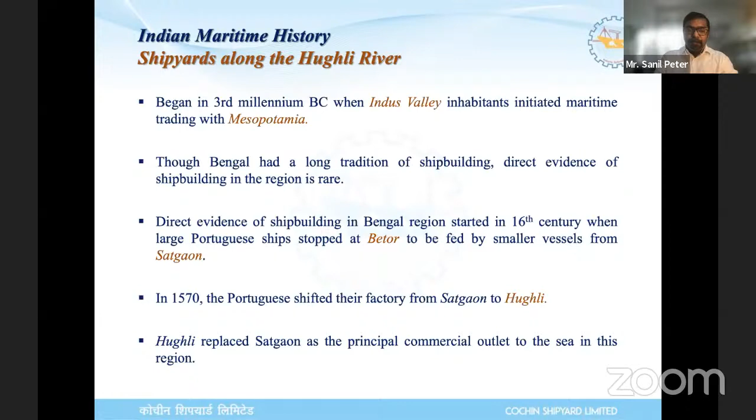We always talk about the western region, Mumbai and all. The direct evidence of shipbuilding in Bengal region started in the 16th century when large Portuguese vessels started coming to Betor, and it was fed by smaller vessels from Satgaon. In 1570, Portuguese shifted their factories from Satgaon to Hooghly, and Hooghly replaced Satgaon as a principal commercial outlet in the marine transport.

Shipping facilities in Calcutta started with the establishment of Calcutta Port Commissioners in 1870, and this coincided with the completion of a railway network in India. And this had a new thrust in India's international trade.

Around the 18th century, mid of 18th century, absence of a docking facility became a major concern, because vessels plying in the eastern region, for any repair, had to be taken back to Mumbai because the repair facility was already available in Mumbai.

So in 1790, a first dock was built at Bangshal Ghat, which is somewhere near the Prinsep Ghat and all. And Colonel Watson commenced the construction of a wet dock in Kidderpore in the 1780s. But this was unfortunately abandoned due to some legal disputes. Later on, Chandan Nagar, Titagarh, Salkia, Howrah, Shibpur, Kidderpore, and Calcutta became the main shipbuilding locations during the British era. This is one of the British era charts of the Hooghly River dating back to 1794.

Coming to Hooghly Docks and Port Engineers, popularly known as HDPEL, is one of the oldest shipyards in India. It was established in 1819 as a private sector shipyard, known as Hooghly Docking and Engineering Company Limited.

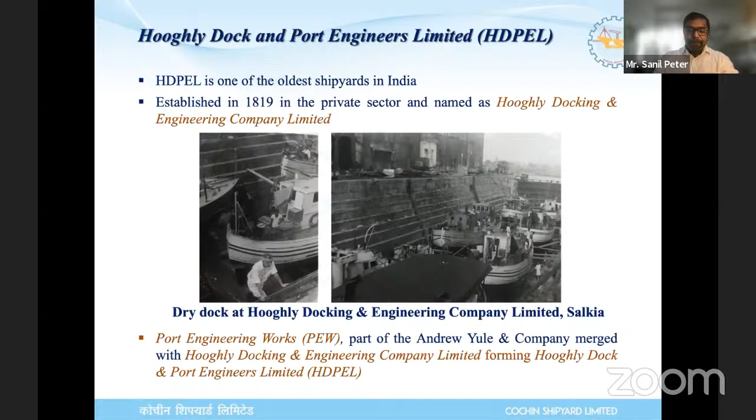It was later merged with the Port Engineering Works, a part of Andrew Yule Company, and became HDPEL. HDPEL has two units, one in Nazirganj and the other in Salkia, on either side of the Hooghly River near Hooghly Bridge. Shipbuilding capacity ranges up to 1,100 tons per annum. They have built various vessels like tugs, dredgers, floating dry docks, trawlers, barges, smaller cargo vessels, etc.

The clients included IWAI, ONGC, Paradip Port Trust, Andaman Administration, and others. The Kalighat is one of the last vessels built by HDPEL. HDPEL was operational till the 1980s, and later ran into financial problems, coming under the administrative control of the ministry.

Calcutta Port Trust is one of the oldest ports in India. In 1820, shipbuilding was mostly concentrated in Sulkia, now known as Salkia, and also in Howrah and Kidapo. In 1892, Kidapo Docks, popularly known as KPD, was completed, and in 1925 Garden Reach Jetty was added to accommodate the increased cargo trade. Later in 1928, King George Dock, now known as Netaji Subhash Dock, was established.

Cochin Shipyard's ship repair Calcutta Ship Repair Unit is operating from Netaji Subhash Dock. It was commissioned in 1928, and in 1973 it was renamed Netaji Subhash Dock, NSD.

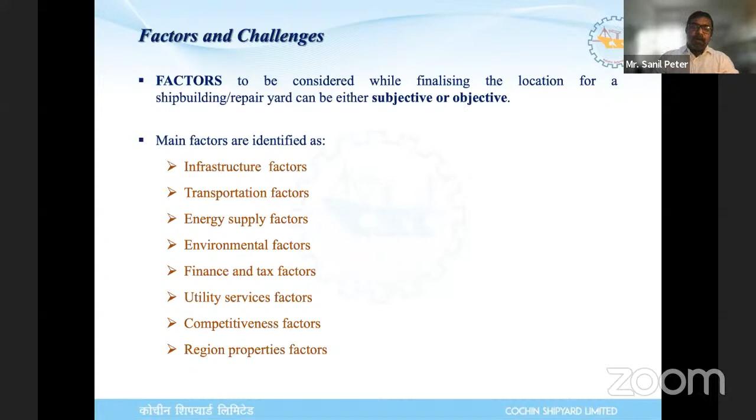All these factors can be further divided into sub-factors like transportation, which we already discussed. Both Calcutta and Howrah are well connected by rail, road, river, and air.

Even then, when we started developing the Nazirgunge facility of Hooghly Docks, those who have visited may recall that particular facility is in a congested area with very congested roads. So before starting development, we conducted a truck trial, a maneuverability trial, to check whether it was possible to bring trailers during night time and whether maneuverability was possible.

Uninterrupted power supply is key to any industrial facility, and shipyard processes like welding and cutting require power supply. West Bengal is considered one of the power surplus states.

Availability of industrial gases, whether it is oxygen, acetylene, or nitrogen - they are easily available, either by trucks or in gas bottles. Availability is not a problem there.

When we consider the climatic conditions, Calcutta region is semi-prone to natural disasters like cyclones and earthquakes. It falls under seismic zone 3. Although the region was badly affected by the recent cyclone Amphan, generally this region is considered not prone to cyclonic activities.

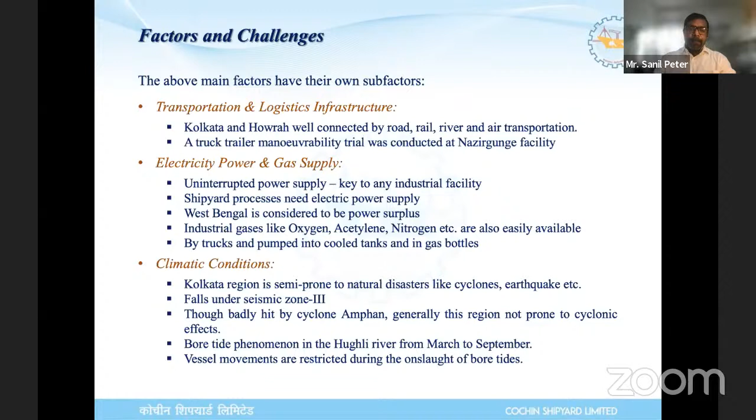At the same time, from March to September, in the Hooghly River there is a phenomenon called bore tide. During this time, vessel maneuverability and movement have to be taken care of, so restricted movements are there. Then another factor is availability of skill set, whether unskilled, semi-skilled, or skilled labor.

This is one of the major cost items in any shipbuilding or ship repair. In Calcutta region, it is supposed to be cheaply available, but from our experience it is not that cheap, because most of the laborers from West Bengal are now either in Kerala or other parts of the country. So it's very difficult to get skilled workers cheaply. Most of the laborers we are getting now are from UP, Bihar, and Orissa.

And proximity of institutes like IIT Kharagpur, IIEST Shibpur, other engineering colleges, and Jadavpur University ensures that we have availability of skilled manpower, and also they give us consultancy services allied with shipbuilding and ship repair.

For a shipbuilding or ship repair facility to be successful, we need support of suppliers, subcontractors, and other industries. We normally go with a turnkey subcontract model, keeping only a minimum staff as key operational staff. It's a turnkey subcontract model that we are following nowadays.

And factors like suppliers and general industries are also favorable in the Calcutta region. There are many steel mills in close vicinity. In Jharkhand there are steel suppliers, so getting steel materials is not an issue.

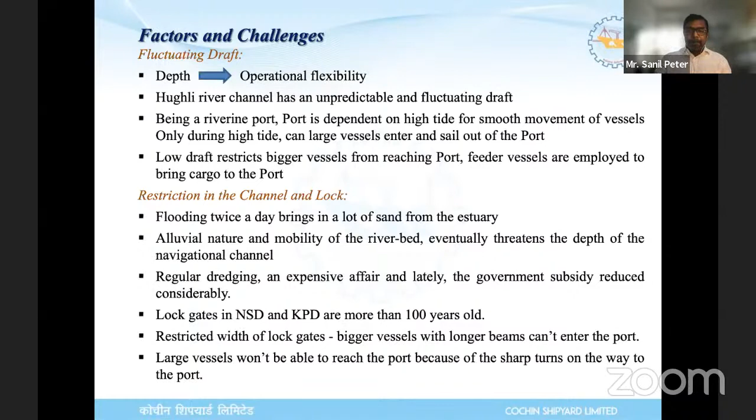The lock gates in both NSD and KPD are more than 100 years old. It still works perfectly, but it's 100 years old. There is also a restriction with respect to the maximum width of the vessels, so bigger vessels with longer beams cannot enter. So there is a restriction regarding vessel size and draft.

Another restriction we identified during the assessment is that the water channel in front of the Nazirganj facility is supposed to be a turning circle, exactly in front of the GRSE and Hooghly docks. So that is meant to be a turning circle and an anchorage point. While finalizing the location for the jetties, we had to consider all these factors.

The limited width of the HDPEL Nazirganj facility was also a challenge, because in order to ensure the proper slope of the slipway, the limited width of the plot was a restriction.

On the banks of the Hooghly River, there are restrictions on permanent concession, so we had to take approvals from Calcutta Port and other agencies. Howrah Bridge also poses a restriction because there is an air draft restriction of 9 meters.

This mainly affects the Salkia unit, so the vessels which go to the other side have a foldable type of mast. You might have noticed this - that is because of this reason.

Then there's introducing a quality safety system, which we normally follow at Cochin Shipyard. In a place like Calcutta, where they are not very used to this kind of safety culture, it was initially quite a bit of a challenge.

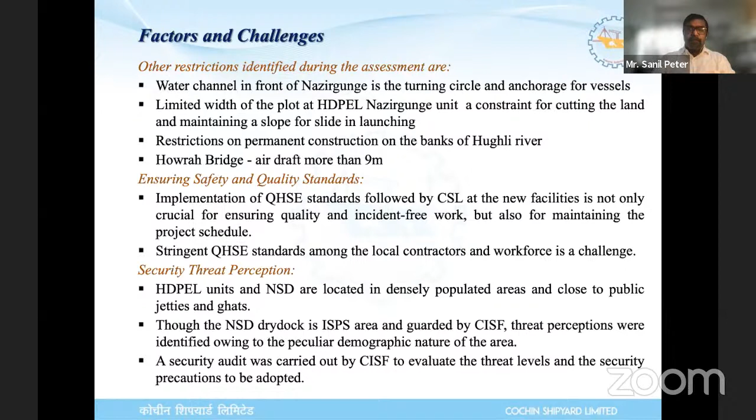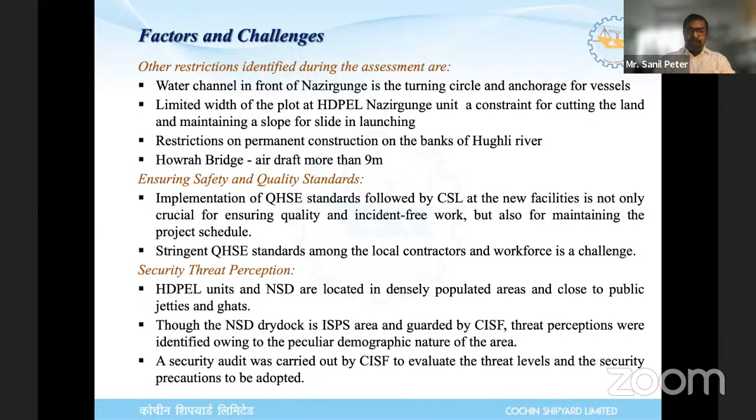Though Netaji Subhash Dock is inside the ISPS area, being a port area and guarded by CISF, the threat perception was high, basically because of the demographic nature of the area. Because of this, we conducted a security audit by CISF, and the security systems were designed accordingly. There was a preliminary assessment done.

Initially, a feasibility study was done. The condition of the existing infrastructure facilities was analyzed, along with economic analysis of the project. Then the business models were studied, and market assessment was carried out. The initial assessments included bathymetry survey, topography survey, soil investigation, and all kinds of initial assessments.

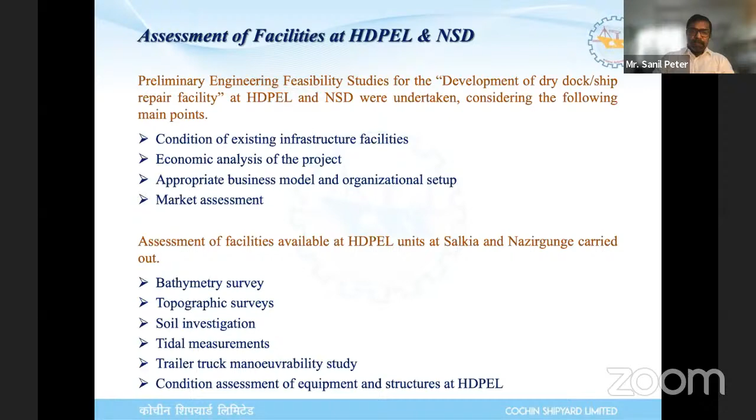Regarding equipment life, Hooghly docks and Netaji Subhash dock are 100, even 200 year old yards and facilities. Most of the equipment, even the main discharge pump in NSD, is 100 years old and was brought from England. It is still working in perfect condition. So for all the equipment in Hooghly docks and NSD, we had to do an equipment life analysis.

Equipment life can normally be divided into three stages. Economic life, where a new machine takes some time to earn back or cover the initial capital cost invested. Then comes the profit life, where the running, operating, or maintenance cost is less compared to the work it can actually do. And the physical life ends when the cost of maintaining the equipment becomes more than what it earns.

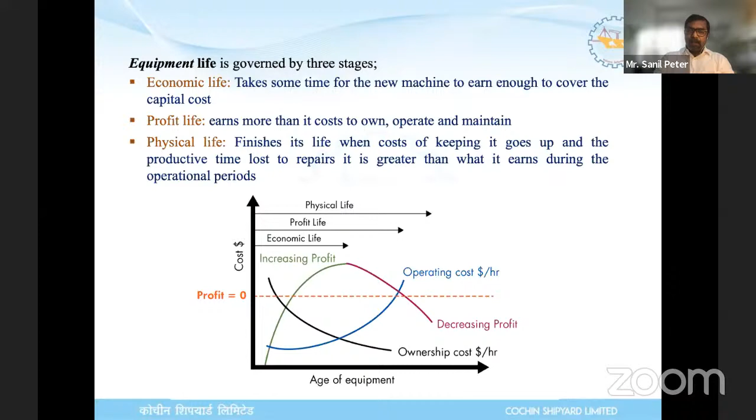So all the equipment in Netaji Subhash Dock and Hooghly docks were analyzed. In Hooghly docks, all the equipment was disposed of. In Netaji Subhash Dock, the main MDP penstock system and dock cranes, we did a health audit, then repairs were done, and now they're in working condition. Later, a detailed project report, DPR, was done for Hooghly docks. Additional surveys were done, and it was decided the development would be done in a phased manner.

As a first stage, we had done the development of Nazirgunge facility, and Salkia will be done at a later stage. It included a refurbishment of the existing end launch facility, and a new side launch facility will be coming up in the next stage. Demolition of all the facilities, all the shops, all the buildings were demolished, and then new facilities had to be brought in.

The only heavy machine shop is the only building which was retained and repaired, and now it is being used as a new assembly bay.

Additional jetties are constructed. Earlier there was only one jetty. Now Hooghly Cochin Shipyard is having 3 jetties. One more will be coming at a later stage, and sub-assembly and grand assembly bays are also having sufficient craneage.

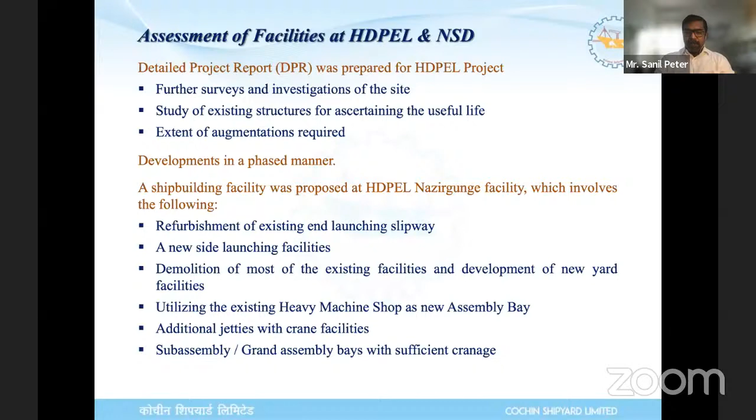Coming to NSD, NSD consists of 2 dry docks, NSD dock 1 and dock 2. Each dry dock is 565 feet long and 75 feet wide.

And penstock system is used for flooding. There were issues with the penstock system, so we had to do some repairs, but after the repair, it is working properly.

It is served by 2 MDPs, each of capacity 33,000 gallons per minute, and it is operated by a box caisson, with provision for a belly caisson in case of an emergency. Both the docks are divided into separate docks by an intermediate caisson.

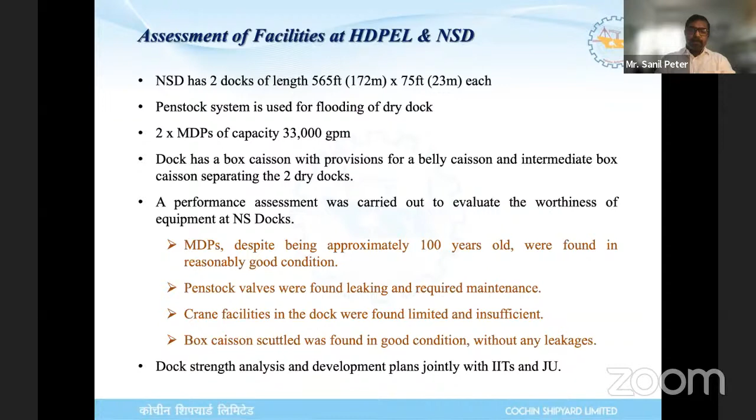There was a performance assessment carried out where all the equipments were operated, and then the shortfalls were noted, and accordingly the repairs were done. The dock strength analyses and further development plans are jointly done with IITs and Jadavpur University.

Towards this, Cochin Shipyard itself has delivered around 10 RoPax vessels to IWAI, out of which 8 are being used in Calcutta and Brahmaputra area.

Movement of passengers and cruise service on coastal and protocol routes are started between India and Bangladesh. One of the vessels which capsized day before yesterday belongs to Bangladesh and was coming to port under this protocol earlier.

Although the ship repair market is around $20 billion, India's share is considerably less, up to 1% only. And 7 to 9% of global trade is passing within 300 nautical miles of the Indian coastline. So there is room for ship repair and shipbuilding. We can increase our share with facility augmentation and all.

And there is no organized ship repair activity in the eastern region except in Visakhapatnam and Chennai. As I told earlier, the protocol route between India and Bangladesh is going to bring a lot of maritime activities between India and Bangladesh.

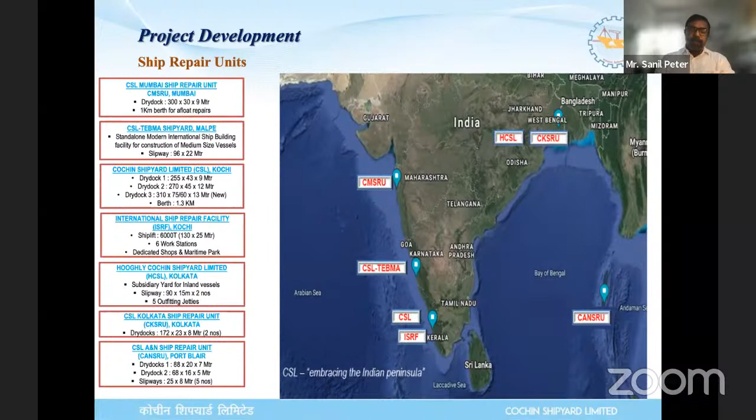The existing end launch facility has been refurbished, at a project cost of approximately 150 crores. Once the project is completed with the side launch facility, we can handle vessels ranging from 100 to 120 meters in length.

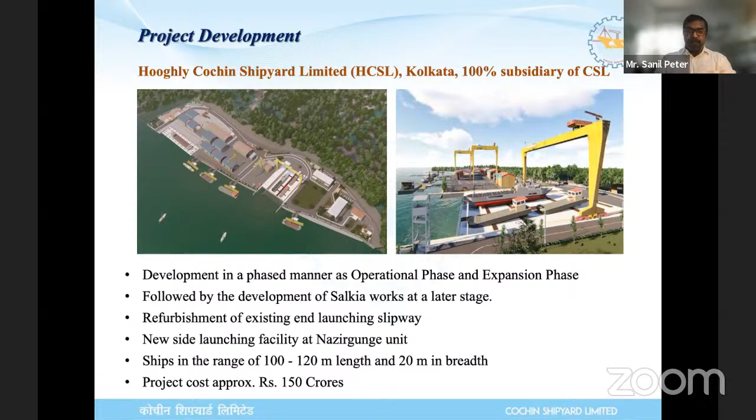The unit is ready for operation, and we are waiting for official confirmation from the PM's office for inauguration. In the meantime, all the certification has been done, and the capacity assessment has been completed by Indian Navy and Coast Guard.

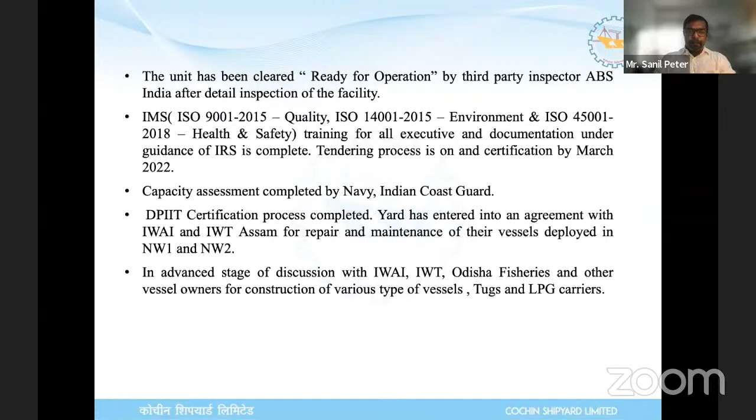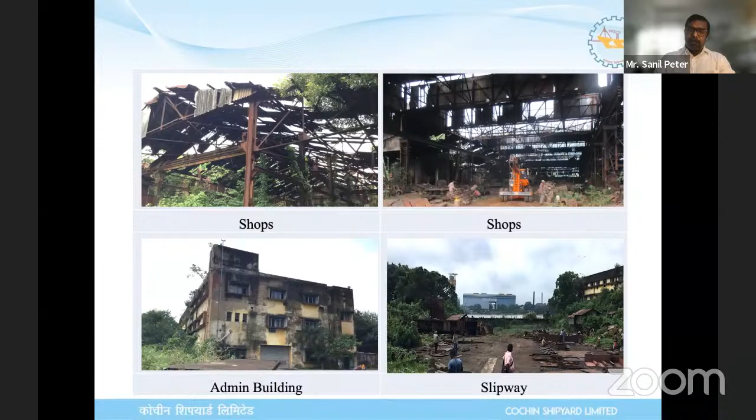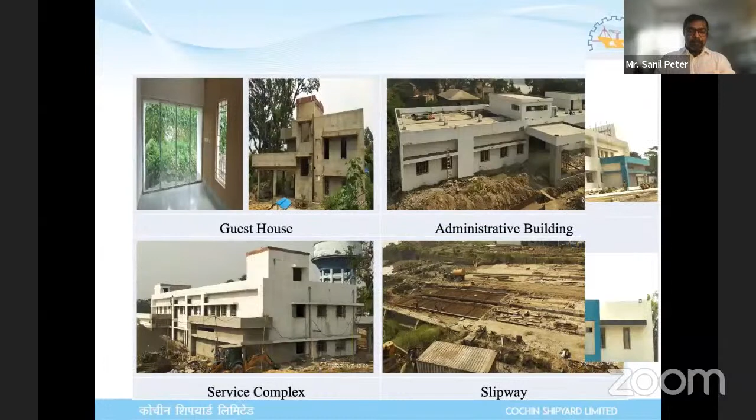This is the condition of the facilities in the Hooghly docks when it was taken over for redevelopment. All the workshops were in dilapidated condition. This is a picture during the developmental stage, and this is how it looks now.

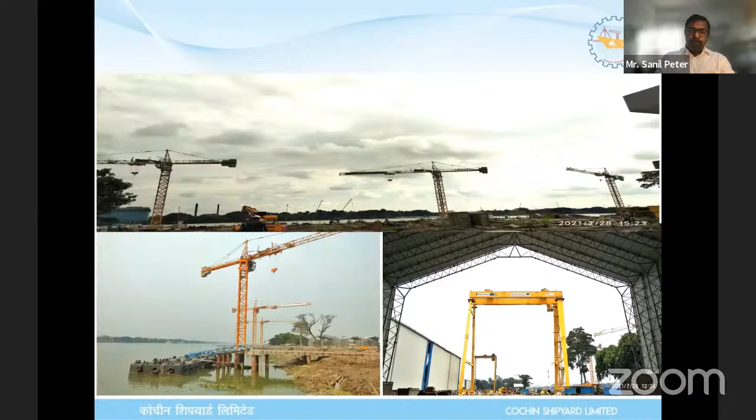These are the various shops, new jetties, gantry cranes for assembly area, sub-assembly area, and grand assembly area.

And Netaji Subhas Dock, the picture on the left shows the condition when the dock was taken over. There were trees growing inside the dock, around 1.5 feet of mud, grass as tall as a person, and a few trees also inside. After taking over, within 6 months time, we did the docking of the first vessel.

This particular facility is jointly promoted by CSL and Kolkata Port Trust, and the agreement is for 30 years on a profit share basis.

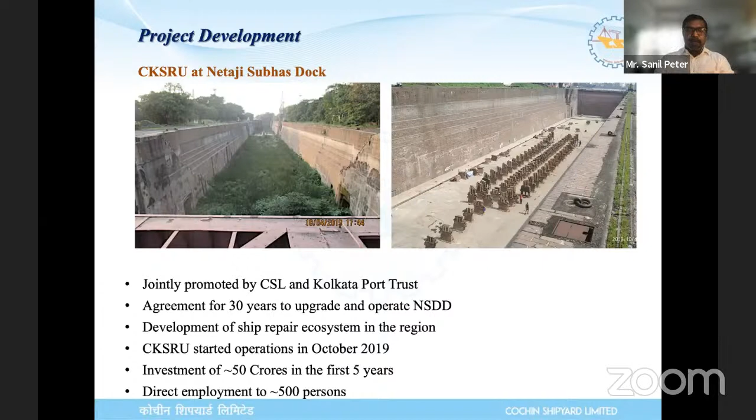We started operations in October 2019, and we plan to invest approximately 50 crores in the first 5 years. As of today, there are 500 persons directly employed on a daily basis in CKSRU.

This is the timeline of vessels. We have repaired, starting with the INS Kavaratti, then Great Ship Vidya. Svitzer Foxtrot is one of the vessels belonging to Maersk Group. Then Sarojini, a Calcutta Port Trust survey vessel. Then Daring Andaman vessel, a dredger. Right now, Sentinel, MV Sentinel of Andaman, and Dredge 15 are undergoing repairs at NSD.

So far, we have completed 8 repair projects, and the revenue we have generated since commencement of operations in 2019 is 55 crores. These are some of the vessels we repaired at the facility.

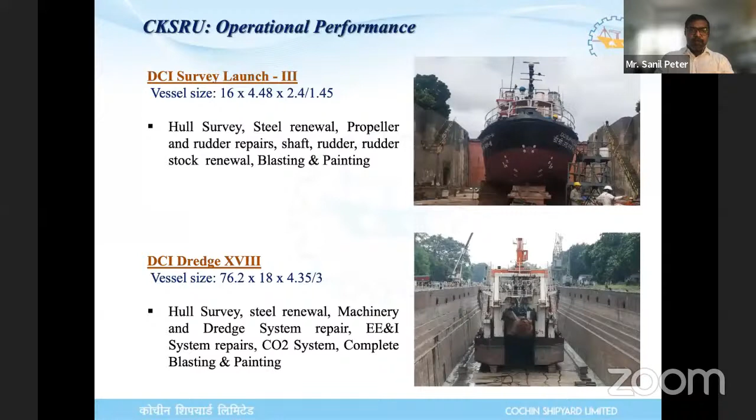Coming to Marine Dockyard, Port Blair. Marine Dockyard is a government dockyard which was operated by the Directorate of Shipping Services, Andaman Administration. The agreement was signed between CSL and the administration for development and upgradation of the facility.

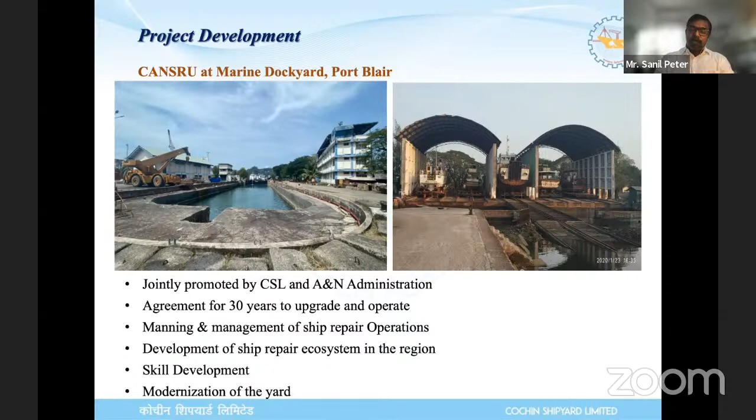We will be basically doing the manning and management of ship repair operations. Along with that, there will be ecosystem development, skill development, and also modernization of the yard. We are right now working on a DPR on the modernization of the Marine Dockyard.

This is a ship repair facility which is coming up in Pandu. Basically, all the inland waterway vessels operated in Assam, Guwahati, and the Brahmaputra River have no proper organized ship repair facility in that area. They had to come all the way to Calcutta to do the repair. So a ship repair facility is being finalized in Pandu.

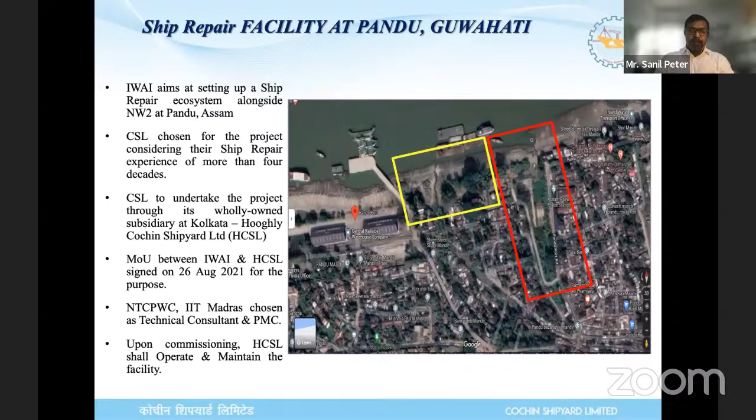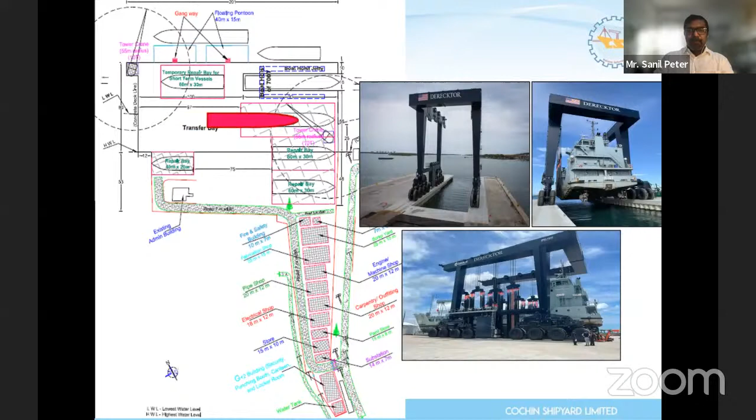The DPR is being prepared, and IIT Madras is the consultant and the PMC for the project. This is the layout. It will basically be having a ship lift and transfer facility. These are the main features: the boat hoist is 700 tons, with boat hoist pier of 60 meters and 15 meters. The maximum size of the vessel is 60 meters. So this gives a rough idea about the facilities which will be coming up in Pandu.

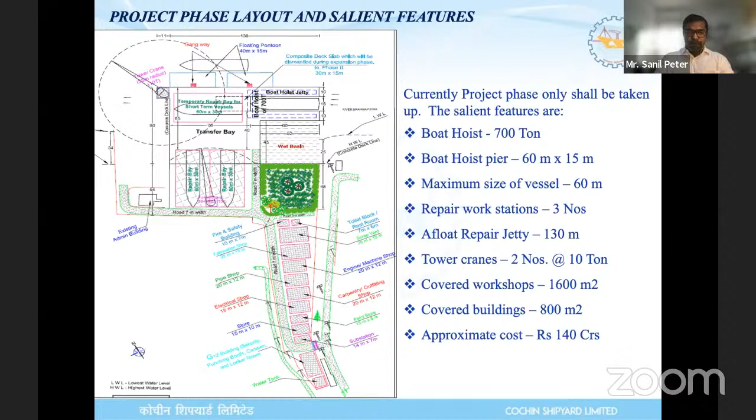With all these facilities coming up, Hooghly Cochin Shipyard Limited will be mostly concentrating on the shipbuilding side, while CKSRU and CANSRU in Port Blair will be concentrating on ship repair, and so is Pandu for the smaller vessels or inland waterway vessels.

All these facilities will be boosting the maritime activities in the eastern region, and we are sincerely hoping that there will be a lot of activities coming up, and the development ecosystem will be totally developed. The lost glory of Calcutta and Howrah, which used to be a hub of maritime activities in the 19th century, can be revived, and a proper ecosystem can be developed on the eastern coast.